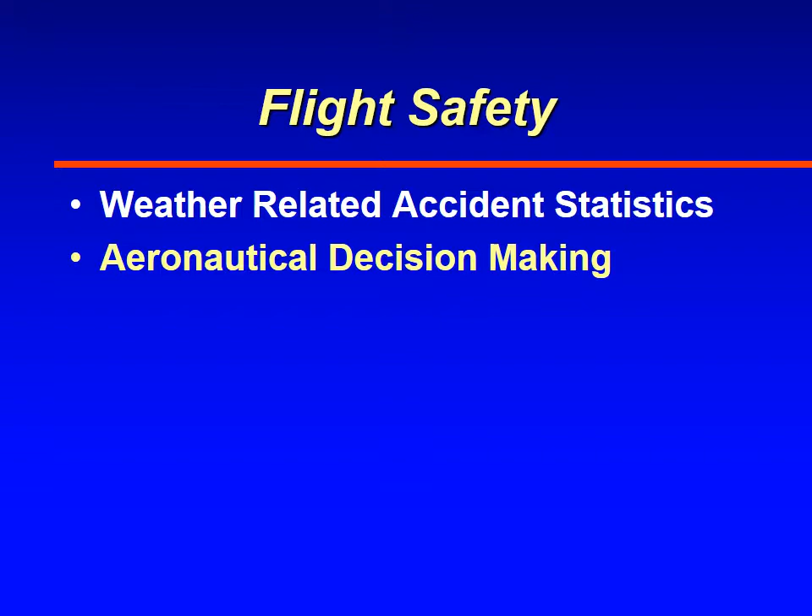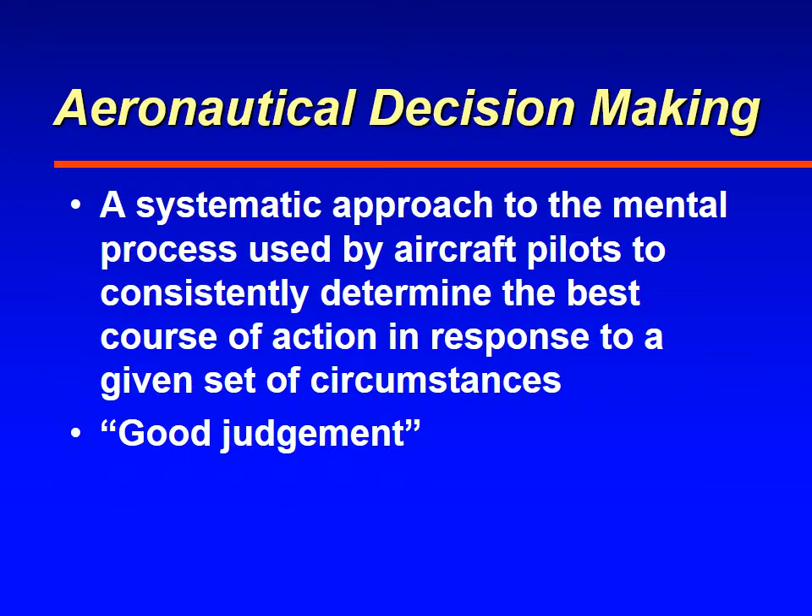ADM basically is a systematic approach that you use your mind to consistently figure out the best course of action for any circumstances that you experience when you fly. So in other words, you systematically go through and make a decision based on all of your options. In the past, this used to be called good judgment, but of course we try and make things more technical, and now we call it ADM.

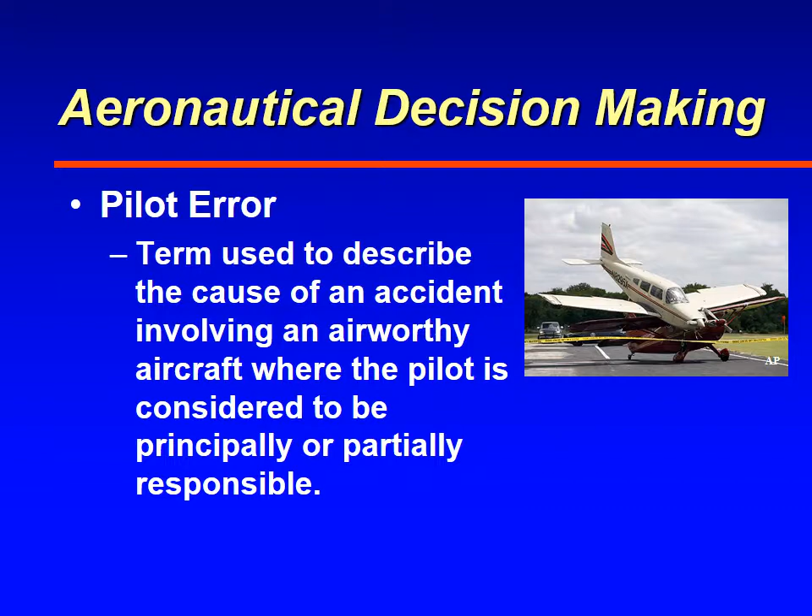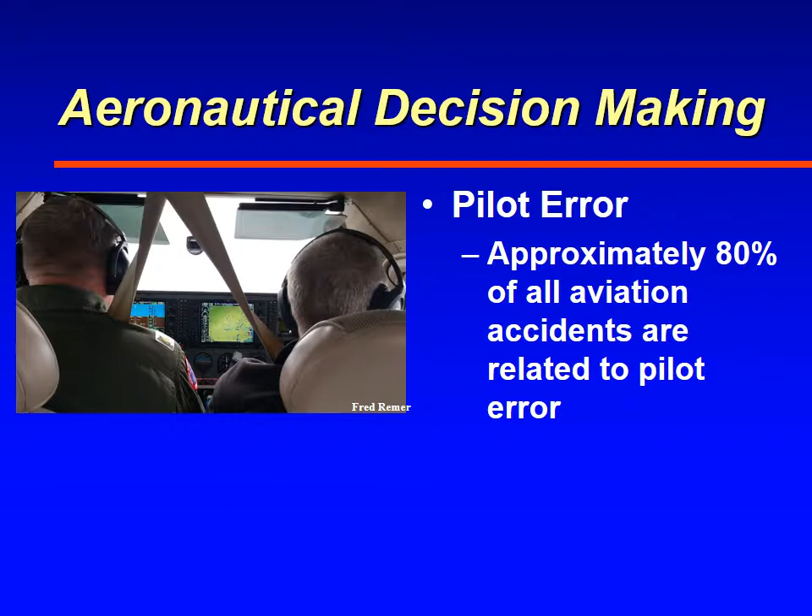And as you know, most aircraft accidents are a result of pilot error. So what exactly is pilot error? Pilot error is a word that we use to describe an accident where an airplane is perfectly good and the accident happens as a result of the pilot. The pilot is mostly or partially responsible for the accident to occur. And of course, as I mentioned, most aircraft accidents are a result of pilot error. Approximately 80%, they say. So the idea here is to minimize pilot error.

In other words, try and reduce the number of accidents that pilots cause by using techniques called ADM, which is aeronautical decision making, and also CRM, which is crew resource management or cockpit resource management. And crew or cockpit resource management, as the name implies, is management. It's a system where you take all of your available resources, whether it be the airplane that you're flying, the avionics, people that are in the airplane, people that are on the ground, the procedures for the airplane, and use that to make the best decisions to promote safety and enhance the efficiency of flight operations. So in other words, it's an integrated approach, taking all of your available resources and making the best decisions based on that.

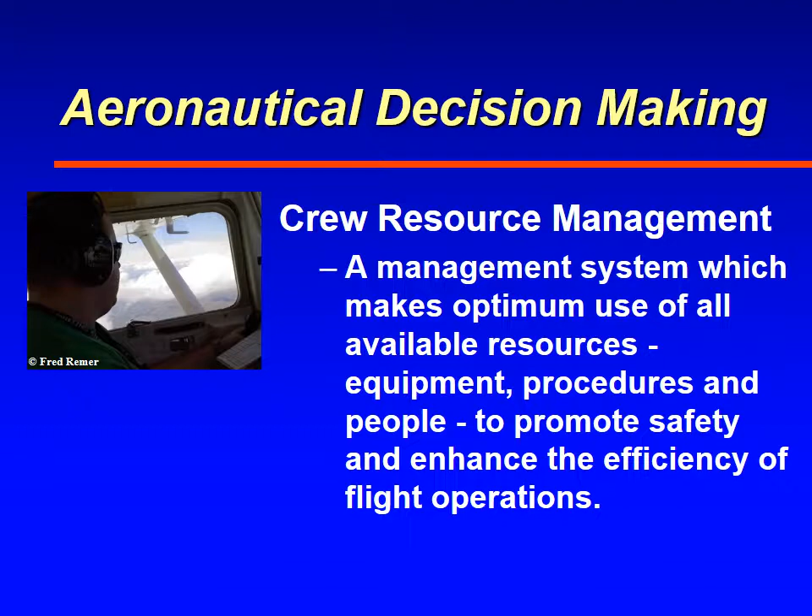So the steps for good ADM, and these are not necessarily in order. Number one, identify hazardous personal attitudes. In other words, take stock of yourself. Are you an impetuous person, or are you a timid person? And then based on that, try to modify your behavior. So that's what learning behavior modification techniques are. Do you have stress frequently? How do you modify or reduce that stress? So that's number three, learning how to recognize and cope with stress.

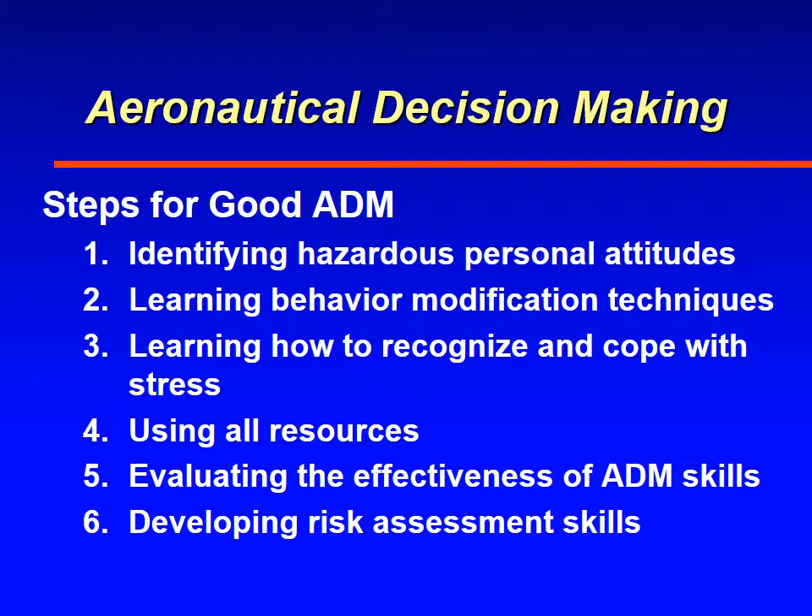Number four, using all resources, and that is part of CRM, crew resource management, all available resources. Number five, evaluating the effectiveness of ADM skills. In other words, besides just making decisions, how good were those decisions that you made? And then finally, number six, developing risk assessment skills. And risk assessment is a very big topic. It's used quite a bit in the military and other locations. We're going to talk a little bit about risk assessment right now.

Risk assessment or risk management is where you proactively identify safety-related hazards. So the key word there is hazards, looking for hazards, and then mitigating the hazards that you can accept, and then trying to totally eliminate the hazards that you cannot successfully overcome.

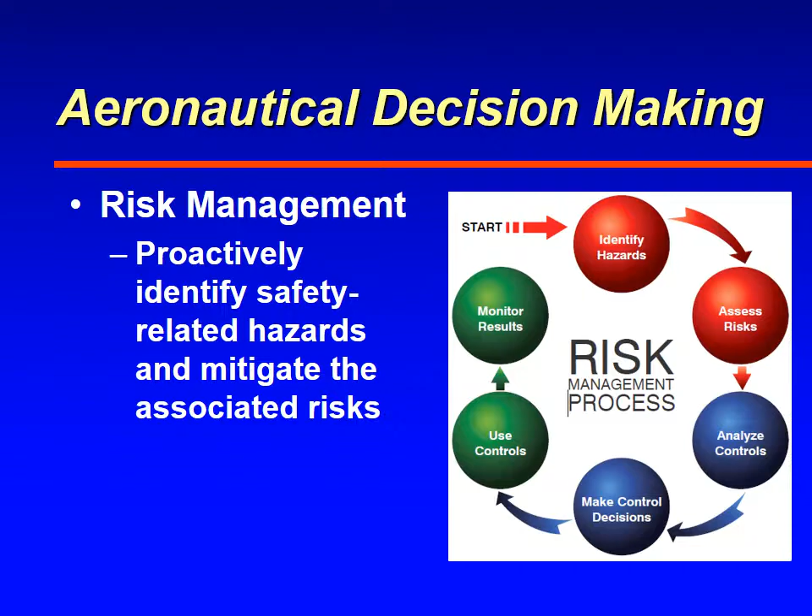So as you can see here in the process, the first thing that you do is you identify hazards. After that, assess the risks: are the risks very probable or not so likely to happen? Are they catastrophic, or are they small risks? Then you analyze the controls. In other words, figure out how to minimize those risks or those hazards. Make the decisions, use those controls, and then monitor results and keep going around, keep identifying hazards, and just keep doing that.

So in assessing risks or hazards, you've probably seen aircraft accidents before, and some things are just really rare. Things like parts falling off an airplane, that doesn't happen very often, but they're highly catastrophic. So if they're improbable but catastrophic, it's hard to mitigate those risks, but regardless, we try. Other things can happen all the time, like we see IFR weather all the time here in our locale when we're flying. And so that is probable, and the risk level with low ceilings and low visibilities could be critical, could be catastrophic, depending upon the skill level of the pilot and also how low the ceiling is and how low the visibilities are.

So we try and figure out the risk. Is it highly probable or improbable? And if an accident does occur, would it be catastrophic as a result of this hazard or negligible? You really want to avoid the things that are catastrophic and probable and try and minimize anything else that has a high risk or serious risk.

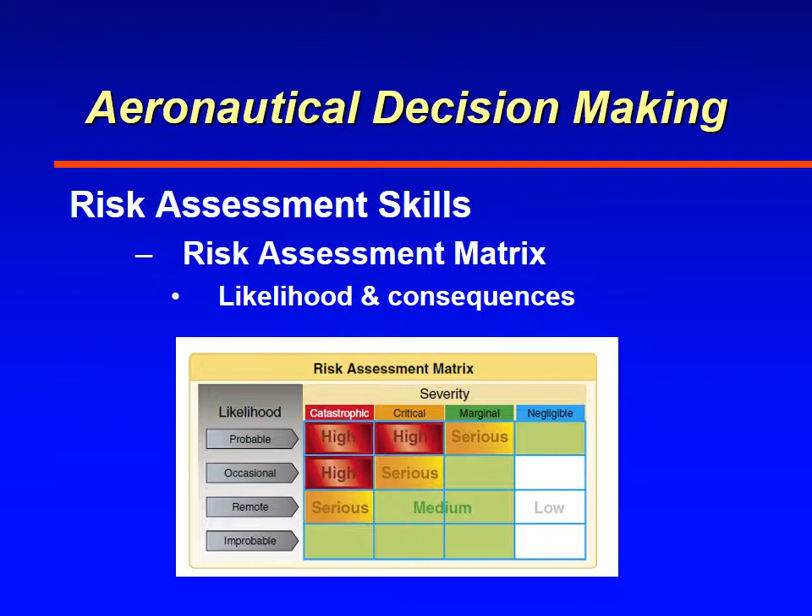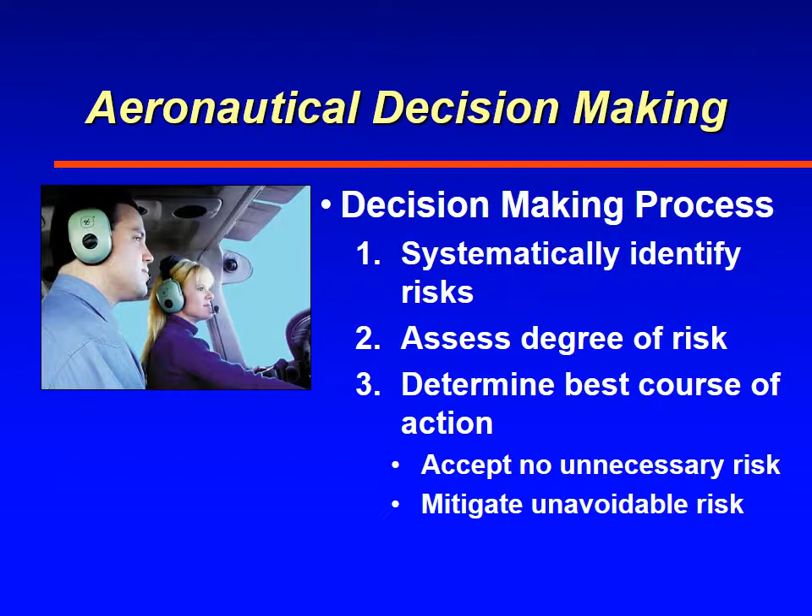So in the decision-making process, we have to identify these hazards, assess the degree of risk using our risk matrix, and then figure out the best course of action. Of course, every time we fly, there's a risk. Every time I fly, it's a very high risk to other airplanes. So we don't want to accept any unnecessary risks, but taking off and landing, well, those are risks, so we try and mitigate those risks. In other words, try and do them as safely as possible so that there are no accidents.

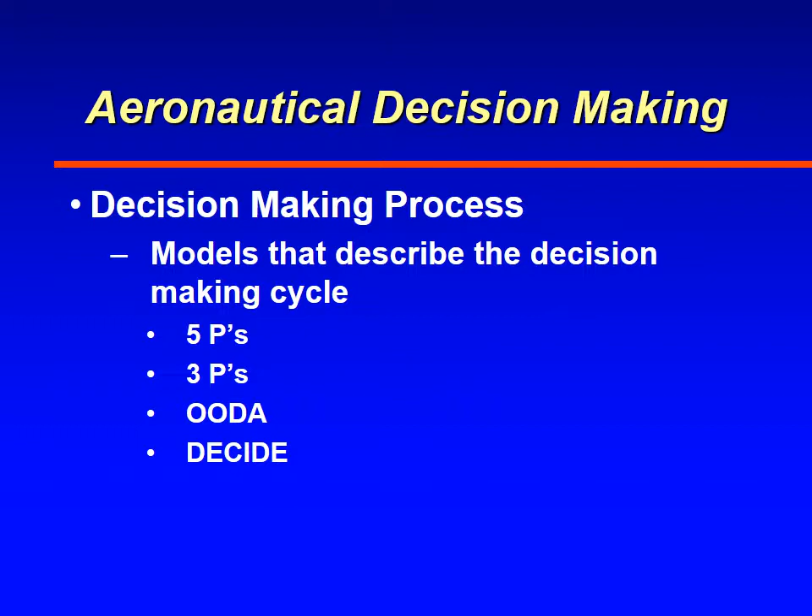So with this in mind, researchers in human behavior and aviation have come up with a lot of different types of decision-making models. And you can read through a lot of different textbooks in aviation. The Pilot's Handbook of Aeronautical Knowledge talks about different models. They talk about the 5 Ps, the 3 Ps, OODA, and DECIDE. I'm going to look at just one of these, the DECIDE process. And the DECIDE process stands for detect, estimate, choose, identify, do, and evaluate.

So in other words, as you're flying along, if you detect a change, you have to estimate how you need to react, look at desirable outcomes or choose, identify which action you're going to take, do it, and then how did that affect mitigating the hazard? In other words, evaluate, and then just keep going through that process over and over again.